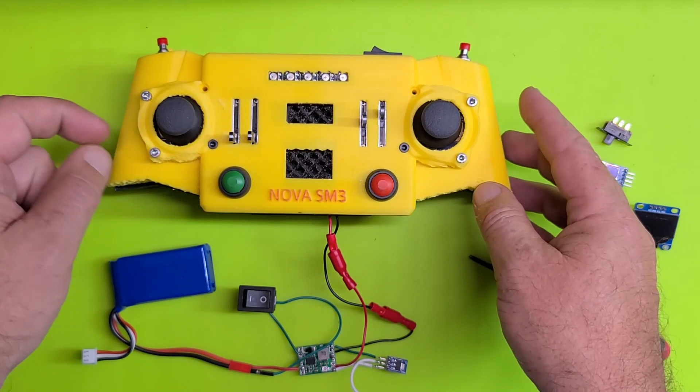This will be a quick update on the remote control, where we're at. We're almost there, and then just talk about a few other things. So let's just dive right in.

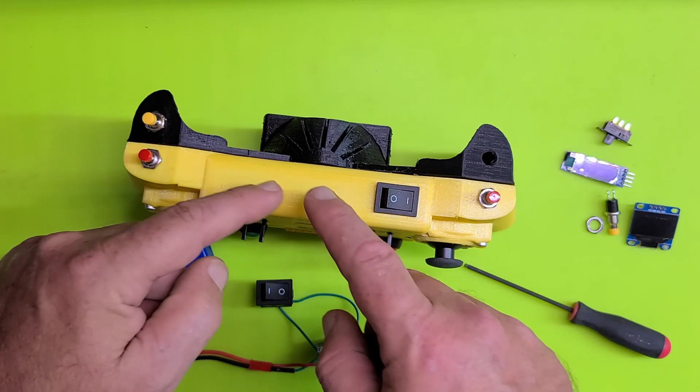First, note, I haven't reprinted my cover since I last did it with this crappy support that I used, but honestly guys, the best way to print both of these parts is standing straight up like that, flat on your bed. You do get support no matter how you do it, but doing it that way, you'll get the least support and only in the inside cavities of the two pieces. And then the front comes out nice, and again, pardon my bottom, that's because I used really low density fill and support. And then the back comes out really nice.

Okay, so I have the entire left side wired up and the RGBs. I have not done the OLEDs yet, and I have not done this side yet. As you can see here, these are the components we have left to install, which are the two OLEDs. And then there's one other button in the back.

And then this switch, two-pole, two-throw switch, I was going to use for some kind of mode switching, but I decided against it because we've got enough electronics in here already, and with some fancy coding, I can use this button to do whatever I want. Including navigate menus and this kind of thing.

So, not that we probably will have a navigatable menu, but as with the PS2 remote, for those of you who've seen me use it or talk about it or have got it running on your Nova, the select button on that remote, each time you select it, sets a whole nother mode for all the controls. Then you set it to mode 2, whole nother controls. So we can do the same kind of thing with this.

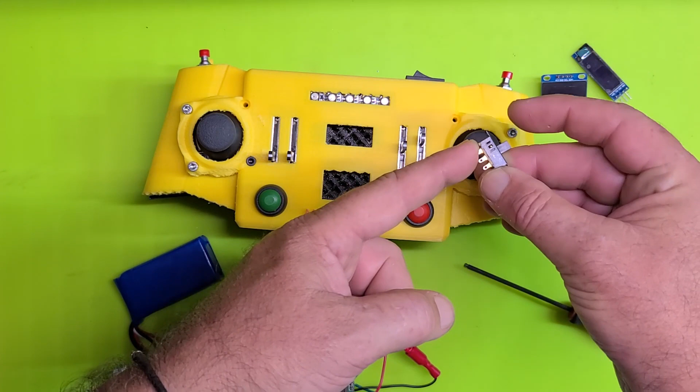I was also thinking I may have used this with the battery charging system, because the way that I do it, guys, is to charge the battery you have to not have it connected to the electronics. So this switch was basically going to switch between the two, so it would be connected and then not connected and then battery connected. But I don't think that's the way to go.

I've only done that in one or two of my projects. I think I mentioned this last time. In fact, I know I did. I don't know much about battery management systems at all. So if anybody else wants to give me feedback, Jordan gave us a couple of ideas, but I'd appreciate some more feedback. Not that I don't trust Jordan, but the more feedback, the better.

We need a good BMS system for this type of battery, which is 7.4 volts. My choice anyway, which of course this is designed to fit that battery, so if you're going to use some other battery, you may have to make changes to your system. Then that goes into a 5-volt regulator. And then let me back up, guys. This is a 7.4 volt battery into the

I got it set for 5.2 volts, the regulator, and then into a 3.3 volt regulator for our NRF unit, since it's very picky. Okay, and then that goes into the power switch, which will be this power switch, but for now I have it here rather than running 2 extra wires into there. And all of this will sit in the back cavity, which I will in a second open up. But while I'm finished talking, let's go ahead and power it on.

So yeah, we just have the OLEDs left and one more switch, and then finish wiring this side. I will probably double back and clean up my plastic a little bit before I finish the wiring, but I wanted to do it as a test, get the left side wired up at least. And for now, I've just synced them all with the LEDs, the RGBs, so that we could see it working.

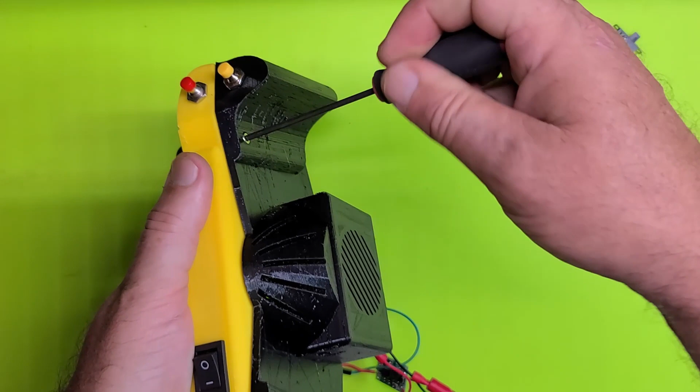Everything works good. We are able to code each button now, which is pretty much already done for the moves that I have Nova performing at the moment anyhow. I'm just going to replace the calls to the PS2 remote with calls to our new NRF communication system.

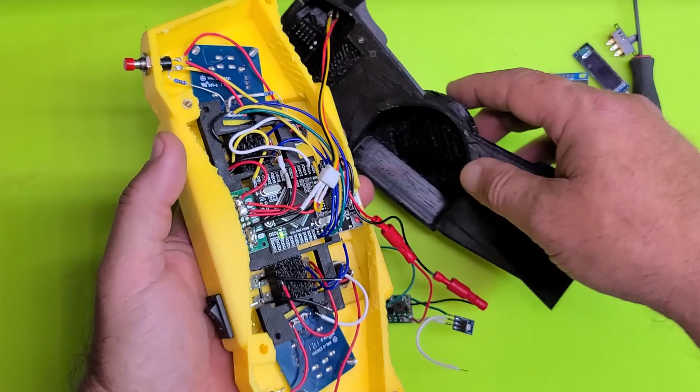Alright, so yes, I also tested out the screws and my alignment and all that, but just by putting 2 of them in, which you can see with 2 threaded inserts, worked awesome. One there, one there. And then yes, I'm still torn on how to wire. I'm going to have 2 switches back here, and that's it. And then the battery management system.

So I decided to just go with 2 barrel jack connectors. Probably I'll get smaller ones. I don't know why these look so beefy. They're supposed to be for this wire gauge, but they look kind of big. But that'll make easy disconnection if you need to separate these 2 parts fully. And I'll also shorten the wires, like this doesn't have to be that long.

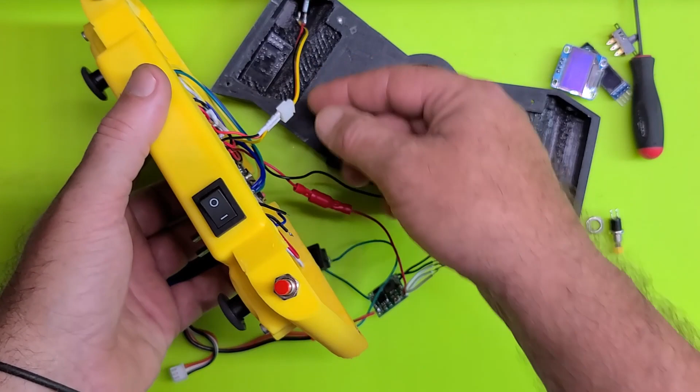But I decided to go with a little JST connector here, where I took the PCB part and just shrink wrapped it to my wires. So I can actually disconnect these if I'd want to. Yes, our push button switches, which there are 1, 2, 3, 4, and then 2 here. So that's 6. Do need resistors, don't forget. So in this case, I just put it in line. It's right here in this ground line.

And then if we look in here now at the wiring, right side is wired, left side is not. I could bring this up here a little bit more. I've roughed in some of the wires for the left side just so I could see how it was going to be getting this plate on and off, and it wasn't bad. But yes, now that it's wired, no go, right? So I'll have to unwire. Actually, I don't have to unwire it all because I've already put these wires in there.

I already have the schematic for this, so I will share that when I'm happy with the plastic, and I pretty much think I am. I think I have a slight 1 degree angle off between these 2 sides. Imagine that. Just on the front plate, so I'll have to fix that. Thank you, Tinkercad, and thanks to my buddy Jordan. This will probably be the last time I use Tinkercad for this project, guys. I've learned a lot about Fusion 360, and that's where I'm going next.

So yeah, basically I popped in a secondary tiny piece of PCB here just for our ground and 5-volt plane, and I really shouldn't be touching all this. It's still live. Short something out. Yeah, and that's it, guys. I'm soldering the wires directly to the Mega, which is easy as pie. Just put a tiny bit of solder on your terminal hole, tin your wire, and I'm using solid core wire, which makes a huge difference, especially when soldering to that board.

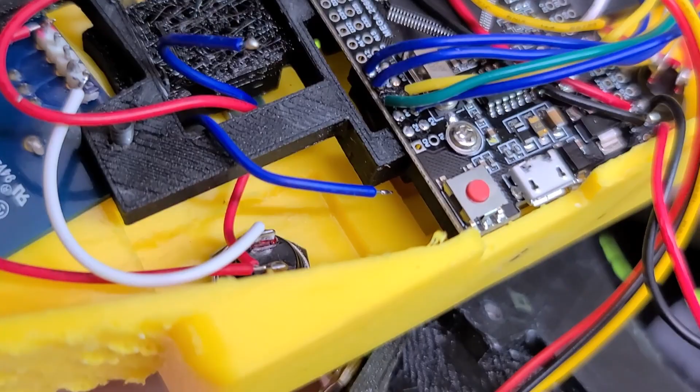So yeah, it worked out good. I'm confident the wires will all be stable and not touch each other, short each other out. Should be good. Oh, and I wanted to show also what I decided to do with the NRF module.

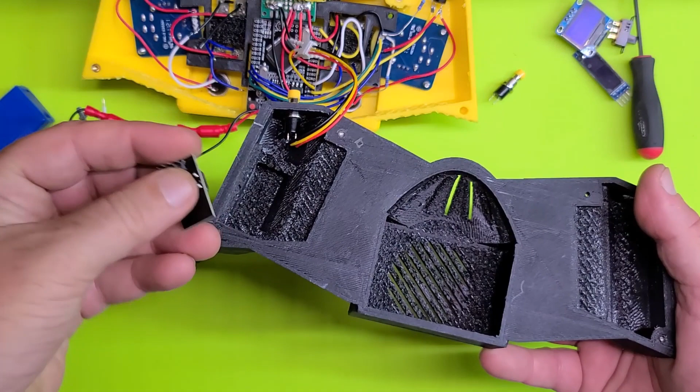I basically just created a little pocket in this grip like I said I was going to do, and it fits perfectly. Probably won't even have to glue it in there or anything to that effect, because it snaps in there pretty good. There we go. So that worked out awesome.

And hopefully, yes, our regulators, the 5-volt and the 3-volt regulator, will sit right in here nicely, and it should close up tight. I'm quite proud of this one, guys. I haven't done much for small electronics or enclosures for that matter, and it came out okay.

Worst case, these flat planes right here, which are kind of useless on the back panel, as you can see, I may end up making those slight cavities. I have the room to do it without interfering with the grips. Maybe half the height of this, if that. Just so we'll have these extra cavities here to run wires. Right now it works because there's still a little bit of room here.

But I think if there's too many wires here, which we should only have 1, 2, 3, 4, 5, 6, at most 8 wires between the two. Oh, and the NRF. So yeah, if there's too many, I think we may need a little bit of cavity space here just to make room for them. But that'll be easy enough to do.

All right, guys. So yeah, that being said, let's go over to the PC and talk about a couple of things. Okay, so a few things to talk about and share with you all, especially those of you building the project. This first one being the utmost important, and then I will put timestamps in the description below if you'd like to jump ahead if any of the other topics concern or interest you.

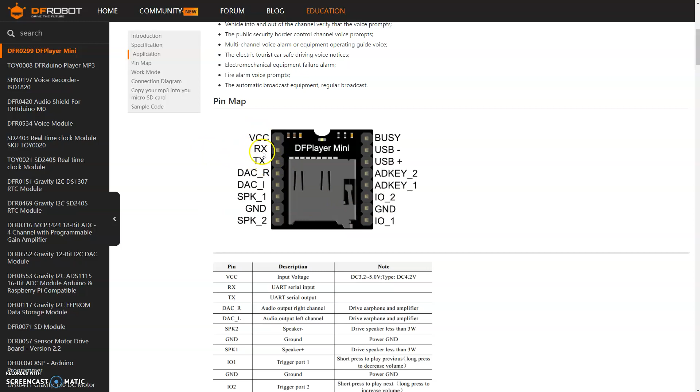A lot of people are putting, which we commonly do, resistors on the RX line. Some are even doing an RX and TX line. DF Robot themselves here suggest, where did I see it? Right here, putting a 2K resistor on the RX line, and they don't have one on the TX line, nor are they using both ground or anything special there. So I don't know, guys.

I really think it could have to do with our power supply being so close to our MP3 terminal on the PCB board, which I think I could show here really quick. Yeah, so this is the MP3 terminal block, right? The JST connector, and right there we have the incoming battery voltage. So that's potentially 12 volts, and then we have the 5 volt and ground here.

So I first thought that all of this was causing interference. However, I skipped using this terminal block and just wired up directly and didn't even put my power connected to any of this, and the problem still existed. So something fishy is going on.

Again, it's not with this board, because several of you, in fact, somebody just sent me a video today of how they just received their board, wired it all up last night, fired it up today, and it was even speaking German. He went ahead and changed some of the MP3 files. So yeah, it's not the board. It's definitely a ground issue.

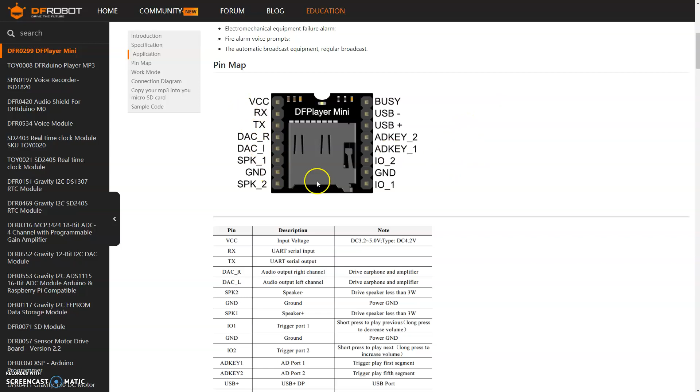Peculiarly enough, if I go ahead and breadboard this with any Arduino board or a Teensy board, I can't get it to work, no matter what wiring I do, no matter what resistors I do. But here's the funny thing. There is a way to run this thing standalone with no breadboard, no microcontroller, and all you have to do is ground out a couple of these pins to make it advance to the next track and play a track.

If I do that, it works fine. So therefore, I know it's not the board, or at least I know it's not the board regarding its control functions. Perhaps somehow I fried the RX or TX line. I do not know, but here's another caveat. I have 2 of these boards. I went ahead and bought a second one, and still nothing, guys.

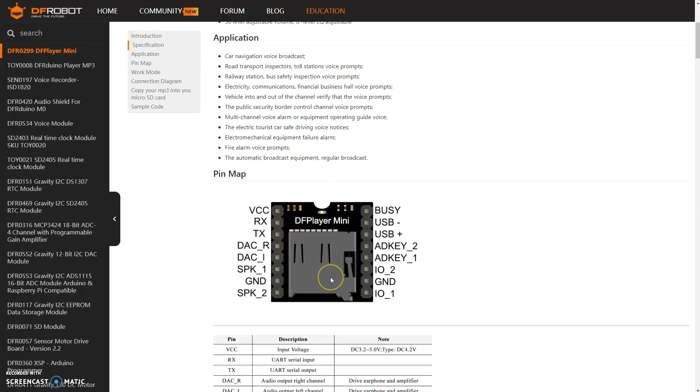Now, when I first got this a few months ago, I think Steffi had mentioned this player to me, and I picked one up, hoping it would work out great for the system, for Nova. And day one, from opening the package, wiring up, it worked great. Yes, the MP3 files, naming them was a little tricky, but once I got that down, it worked fine. Got it in Nova, it worked fine. But since I last unwired it, it has not worked again.

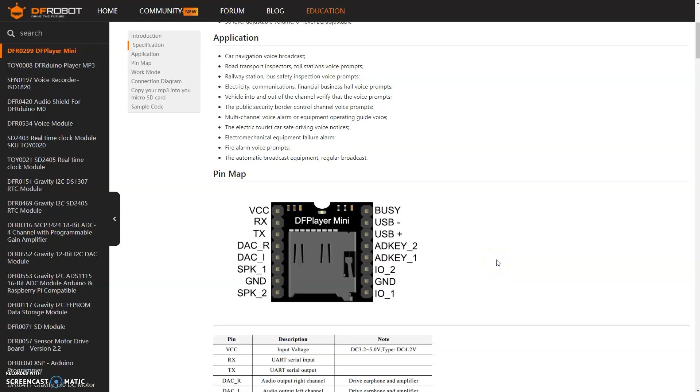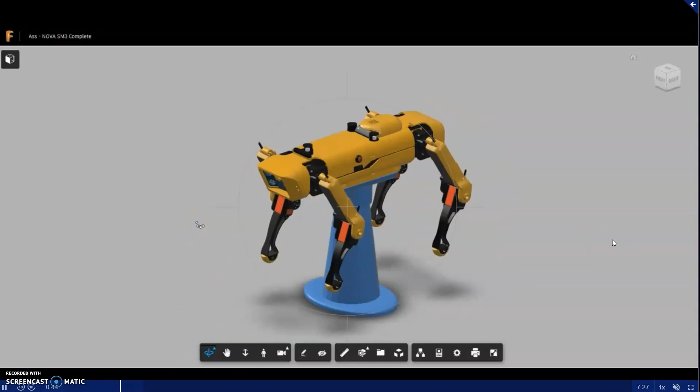Okay, guys, so also Jordan has done some amazing work on this 3D modeling within Fusion 360. And there is a Fusion 360 viewer, which you guys will be able to use, what he's showing here in the background as I'm talking over his video. And he's just going to show the controls here a bit. And so without even having Fusion 360, from what I understand, you'll be able to use this tool. If you do have Fusion 360, hurrah for you, because now you'll even be able to import these models into 360 and do with as you wish.

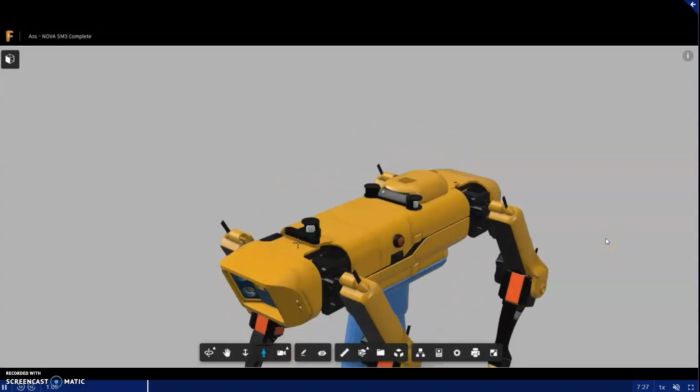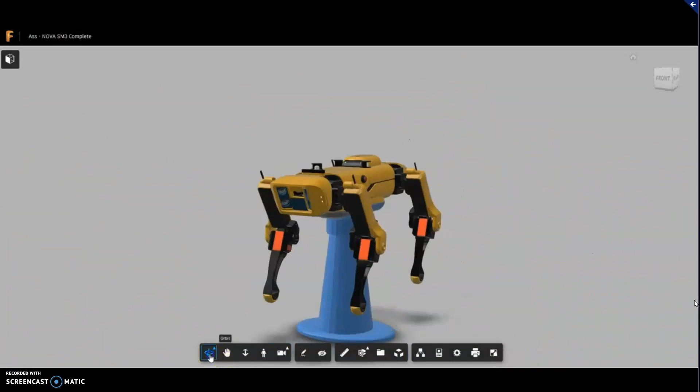He's made a lot of tweaks and fixes to them. He's even gone ahead and taken this here a step further. Look at this walkthrough version here, guys. He's actually navigating, walking around inside of Nova right now. Pretty cool. As you can see, he went ahead and did the whole PCB board with all of our hardware. And this video we're watching here is at least a week old. He's done a bit more work, even down to adding all of the nuts and bolts, guys.

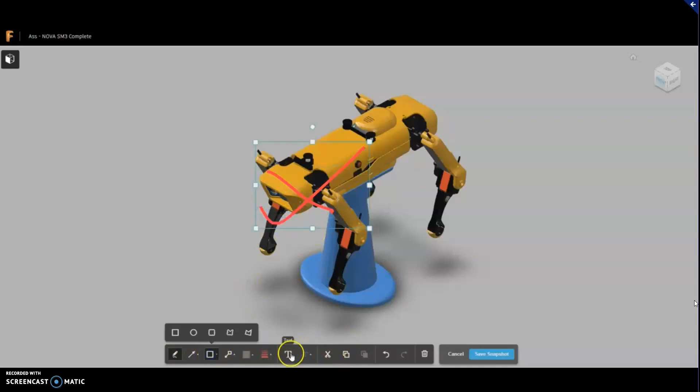So, yeah, can't say thank you enough, Jordan, again. This should be ready soon, I would think. There are a few pieces of the plastic that I have to make updates to, or he and I combined, and get that done and make sure they're all tip-top shape and ready to go. And we will be releasing this to everybody soon. He's even going to, which I think is a great suggestion, rename a lot of the files so that things are less confusing. As a lot of you know, those files were the original name from the original creator of this model.

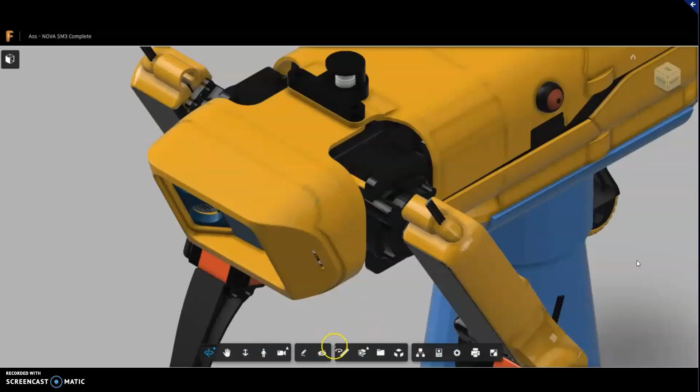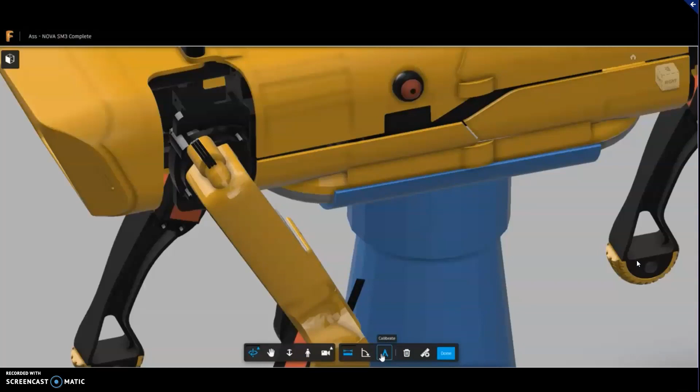Okay, so yeah, as he goes through the rest of this, I have one more thing to talk about. So as far as the future of Nova, so many of you are so excited and have so many plans and so many ideas for this project that, as you probably remember, I started to feel kind of overwhelmed by it all, and therefore I think I'm going to let the community do with it as it may and call an end of my leadership, at least in the project, by the end of this version. So once I finish this remote control, once I finish her walking gaits, once Jordan and I have tweaked all this plastic and got everything working great, all electrical problems, not that there are any, just an MP3 player like I talked about,

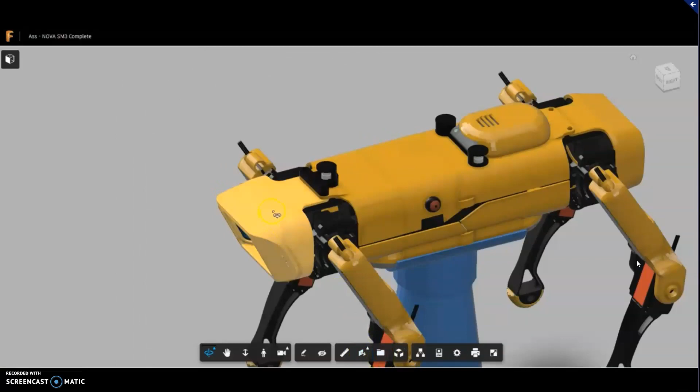and look at this section view, guys. That's going to be so awesome for any of you who want to try and re-engineer some of the parts to make them stronger or stiffer or what have you. That's a cool tool. And then next he's going to just show you how to navigate all the parts and the exploded view, which is pretty amazing too. Let's just watch that for a second. Look at that. Pretty cool, huh, guys?

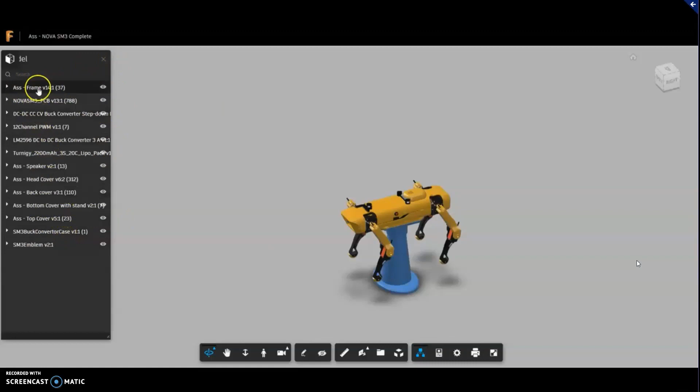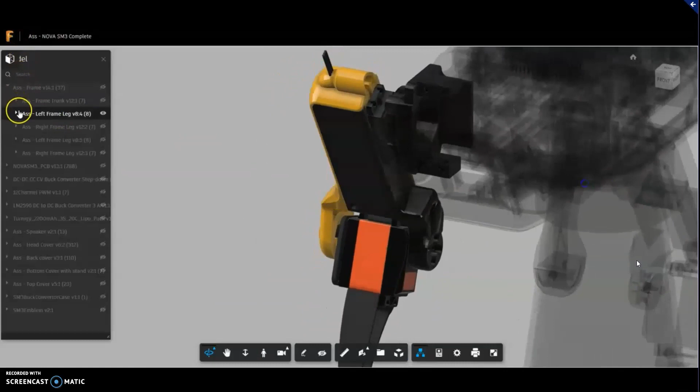All right, so like I said, I am going to do what I intended with this project in the first place, which was just to build a quadruped robot with a few sensors on it, a little bit of interactivity, and a few walking gaits. And yeah, I'm almost there with the end of that goal of mine. So when I do, I will call it probably Nova SM4 maybe, but I may just stop at 3. Version out the software and call it a day. At that point, I probably already know who I'm going to hand the reins over to as far as the GitHub goes, and I'll maintain the website if you'd like me to, but I will still be involved with the project.

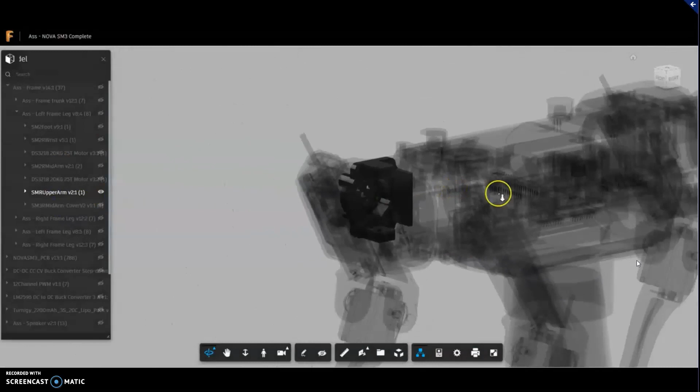I'll still be part of the community, but I don't think I will be making videos or anything like that anymore, because honestly, guys, I'm ready to move on to a new project soon, I think. Not that I'm bored with Nova, but I have a strange psyche that doesn't sit still for very long. So, yeah, this project is coming up on, I think it'll be a year in November, right about when I got my 3D printer. Maybe a little later than that.

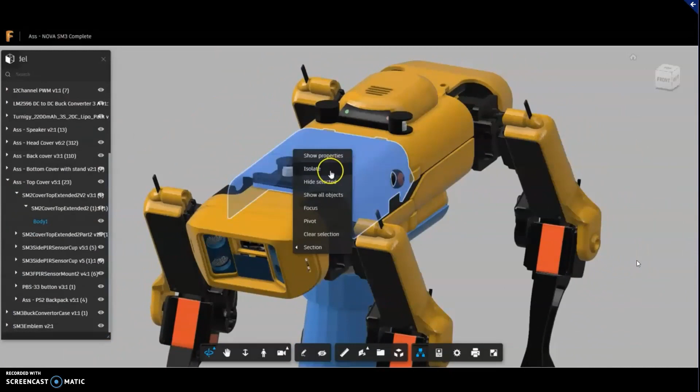If we look at the videos, I was probably 2 months into it when I posted the first video, I think, which was in January maybe. So, yeah, about November I started it. So that will probably be my absolute due date. Come the year anniversary, she better be walking. The remote control will be done and all fully working, and all electrical stuff and structural things done and set for.

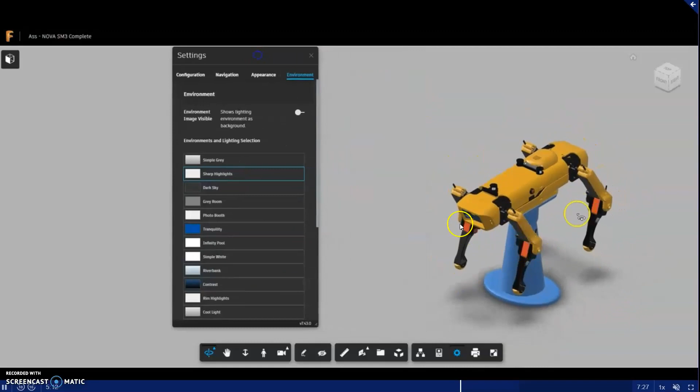Anything from a head that's been moved up to the top and actually on motors so it can move and rotate. Camera in the front. Somebody's talking about LiDAR. There are a couple of other sensors. People want to do pressure sensors in the feet, possibly. So there's a lot going on in there. So check it out if you're interested.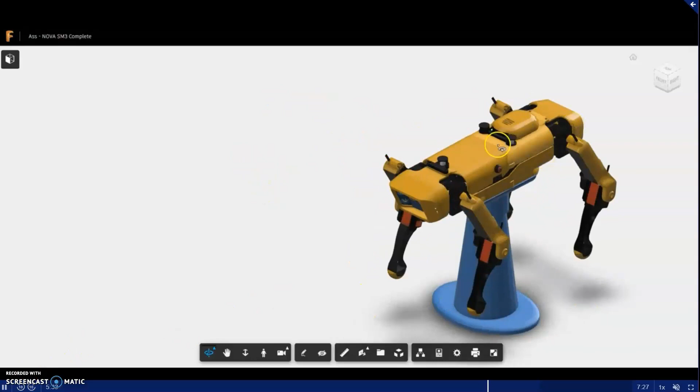All right, what else? Yes, I really want to update this. We have the instructions here, which pretty much came off of the Instructables site that I built, which isn't the most detailed of a build instruction. So things like the Nova EEPROM code that I just mentioned to you all, I think I'm going to add a page here of tips and tricks or something to that effect. They're not really tricks, but things to watch out for, caveats like that I don't have in the documentation, and probably you wouldn't find in a video even if I did mention it, because it's such a small thing, but important.